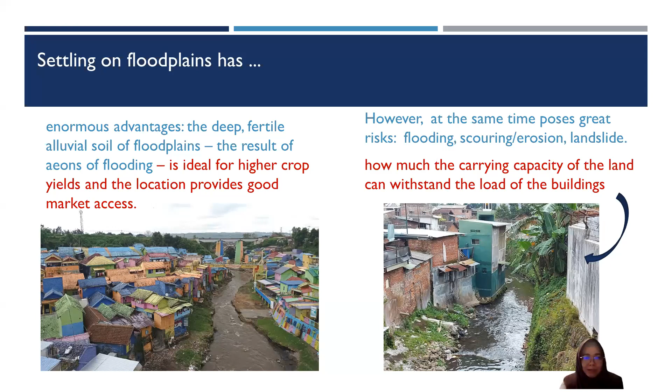In this flood-prone area, balancing development needs and risks is essential. The evidence both ways is that people will not, and in certain circumstances cannot, abandon flood-prone areas. Most importantly, there is a need to find ways of making life sustainable in the floodplains, even if there is considerable risk to life and property. The best approach is the integrated management of floods, or other disasters in this area.

The concept of IFM has already been developed in some countries in the world, like the flood-prone area in the Mississippi River. There is flood management there, so if the water level rises, there's already a system for how the mechanism works, so the big cities along the Mississippi River did not experience flood damage or flood disaster. This is called integrated flood management.

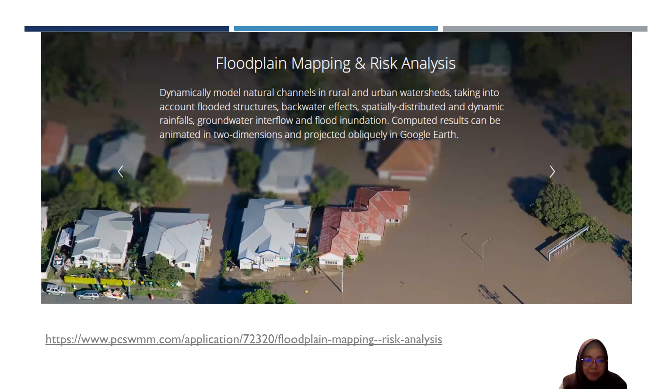This is an example from the Netherlands, the Waal River area, flooded land and floodplains. There's also good best practice on how to manage the flood-prone area in Europe, the Netherlands, etc.

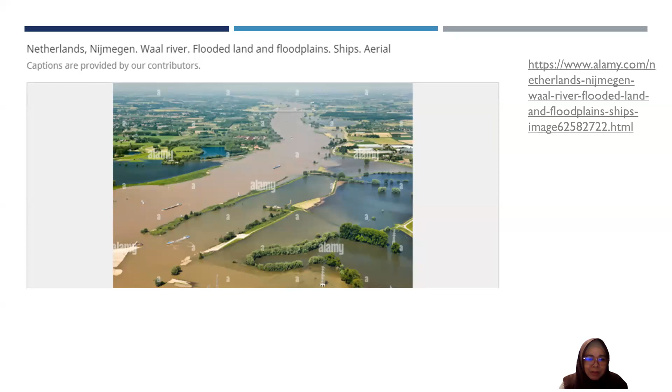This is the biggest floodplain area in the Netherlands that will be developed into a city park. This area is designed to submerge with water when there is heavy rainfall or a typhoon. So this area is not eligible for settlement or houses or buildings — just leave it as open area. So if there is a typhoon or heavy rainfall, this area will be submerged.

This program is called Room for the River. Room for the River encompasses four rivers: the Rhine, the Meuse, the Waal, and the IJssel.

Now, we in the Philippines and Indonesia probably have the same situation — we are now experiencing heavier rainfall, and because of climate change, the mean sea water level is becoming higher over time due to the impact of climate change. So the river needs more room in order to not flow uncontrolled to other places. So we have to provide room for the river so we can control the danger of the river flow.

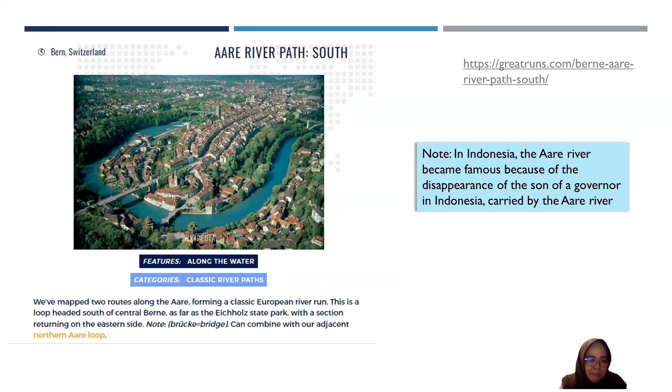We also know about the waterfront city and disaster management effort. City that directly faces the ocean or the coastal area. In the last years it developed into a waterfront city. This has an objective as a tourism destination because the view is very good, etc.

So the city is developed to be one of the tourism destinations. However, there still poses potential hazards here. So we have the waterfront city concept generally focusing on social and economic activities located in coastal areas. It is also necessary to consider the potential for natural disasters that can paralyze these activities.

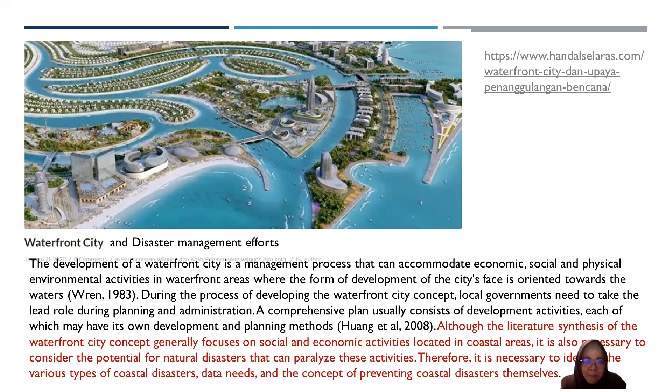This dialogue block is a question for all the audience here. Are there other floodplain areas that you have encountered, or maybe someone who has experience involved in flood management activities in flood-prone areas? Would you please share information here? Any of the students? Maybe any of the students from the Philippines in the middle of the lecture. Actually, we are still in the middle of the lecture. If you have any question, please feel free, or if you want to share about your area.

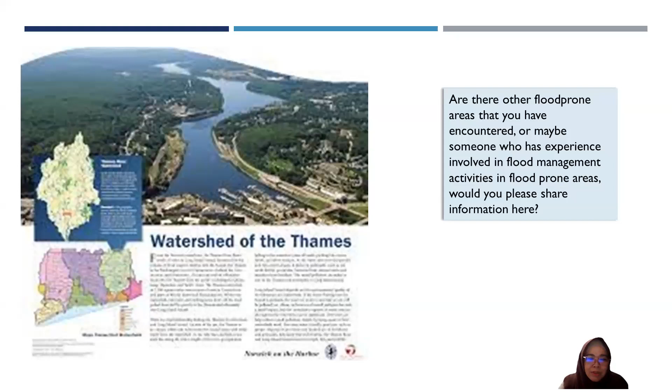I believe here in Indonesia and also in the Philippines, we experience heavy rainfall, and we have a lot of areas that are prone to flooding. So is there anyone who wants to share? If not, then we might continue first, and we will maybe do the sharing later. Students can type in the chat box if anyone wants to share their experience.

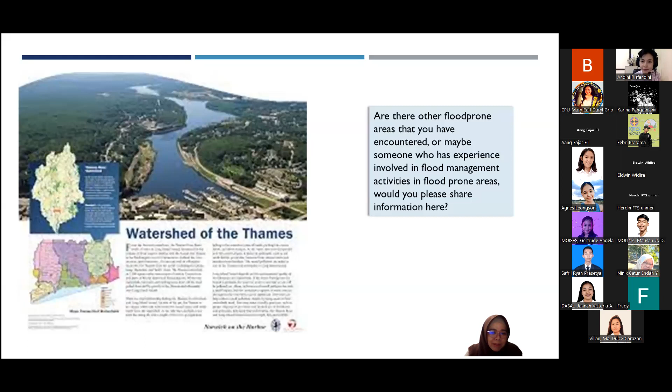So the point is that an understanding of the interplay between flood, the development process, and poverty is vital. The most important thing is that a community with a weak asset base and few multipliers of community well-being is exposed to many different disturbances, some of which may have a greater impact than floods.

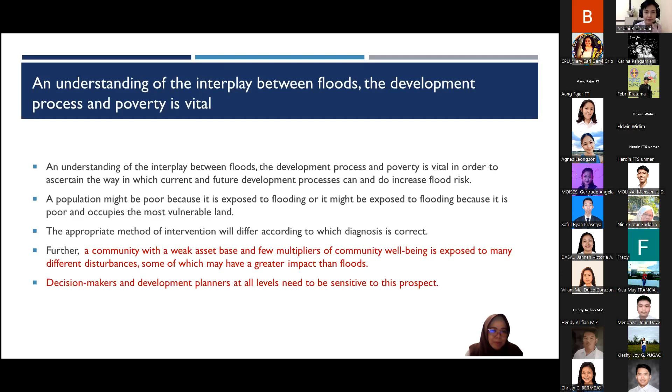Decision makers and development planners at all levels need to be sensitive to this prospect. So we will talk about risk and vulnerability. What is risk and what is vulnerability? Risk is a combination of the chance of a particular event with the impact the event would cause if it occurred. Risk therefore has two components: the chance or probability of an event occurring and the impact or consequence associated with that event. The consequence of the event may be either desirable or undesirable.

Vulnerability is a function of the ability of a society, community, or household to mobilize the assets available to meet the challenges posed by flooding. The capacity of the society to maintain or improve its quality of life in the face of such external disturbances may be enhanced either by reducing flooding or by improving their capacity to cope with the disturbances.

This is the traditional flood management option. First, storing runoff, like we build reservoirs, detention basins, dams, etc. And the next is separating floods from the population, increasing the carrying capacity of rivers, source control to reduce runoff, emergency responses, recovery and rehabilitation.

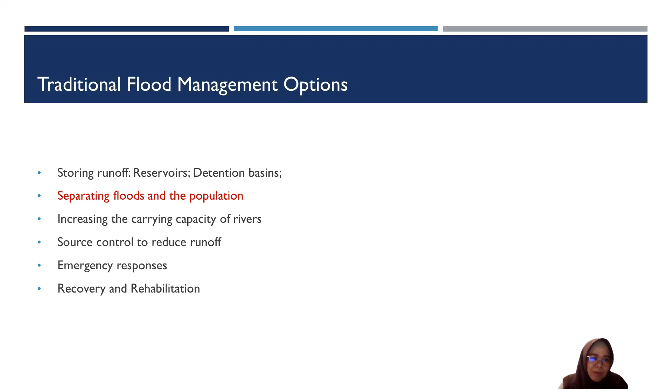The shortcomings of past flood management practices: ad hoc and standalone, reactive rather than proactive, emphasis on structural measures, monodisciplinary, and failure to learn from the past.

With integrated flood management, flood management practice is set to be proactive rather than reactive.

Challenges of flood management include the increase of population, impact on economic development, vulnerability, climate variability, hazard frequency, upstream urbanization, and hazard magnitude. The impact is that the magnitude of the hazard becomes higher. The second challenge is securing livelihoods and ecosystem conservation.

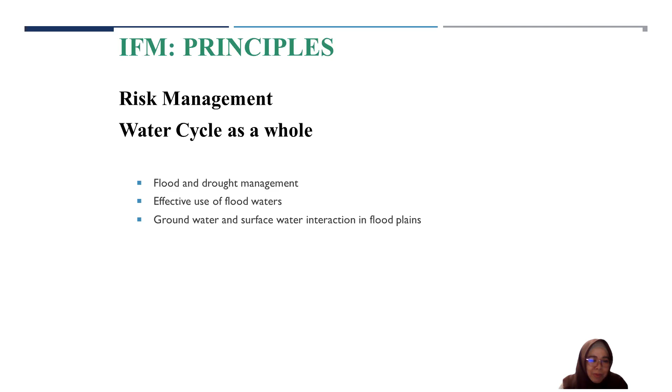Water cycle as a whole: if we apply the IFM principles, we have to know about the water cycle, like flood and drought management, effective use of flood waters, and groundwater and surface water interaction in floodplains.

The next principle is the multi-hazard approach, cross-sectoral integration of disaster management strategies, not only for flood hazard but other hazards that may come up, including disaster risk assessment, early warning and forecast.

River basin approach: we have to use a river basin approach because water or river naturally acts according to the characteristics of the river basin.

Public participation is important because the hazard affects the people, so it's very important to involve public or community participation.

IFM is towards an integration of land and water management, upstream and downstream, structural and non-structural, short-term and long-term, local and basin level measures, top-down and bottom-up decision-making, development needs, ecologic and economic concerns, and functional integration of institutions.

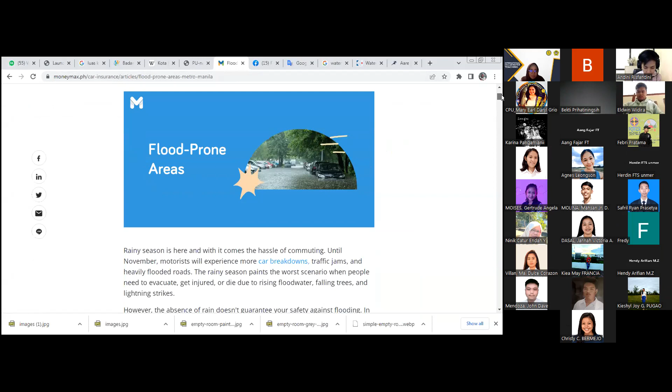Maybe you can see here what the flood-prone areas in the Philippines are. This website is for MoneyMax, which I think is an agency that helps those affected by flood repair things like cars or homes, so mainly vehicle repairing.

So they have identified the areas in Manila that are frequently affected by flooding because of typhoons, heavy rainfall, etc.

Rizal Avenue - maybe a student from the Philippines can give a comment or explanation. Is it true that this area experiences flooding?

This is in Caloocan City. Flooding in Caloocan City is usually caused by river overflow, excessive rainfall, and inadequate channel capacity, affecting areas like Rizal Avenue, ITC compound near General Luis Street, and General Pio Villanueva Street to Lapu-Lapu Street.

Okay, maybe the student from CPU can give a comment here about flood prone areas in Las Pinas. Maybe you have directly experienced this flood.

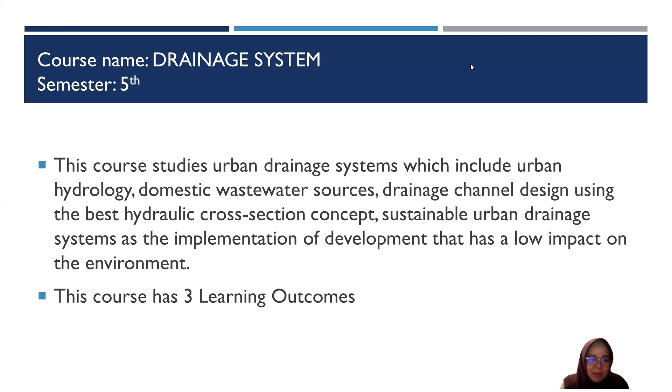This is the semester learning plan. The course name is drainage system, for students in 5th semester. This course studies urban drainage systems, which include urban hydrology, domestic wastewater, etc. This course has 3 learning outcomes. The first is students are able to design new drainage channels and evaluate existing drainage channels using the best hydraulic section principle. This is the sub-course learning outcome.

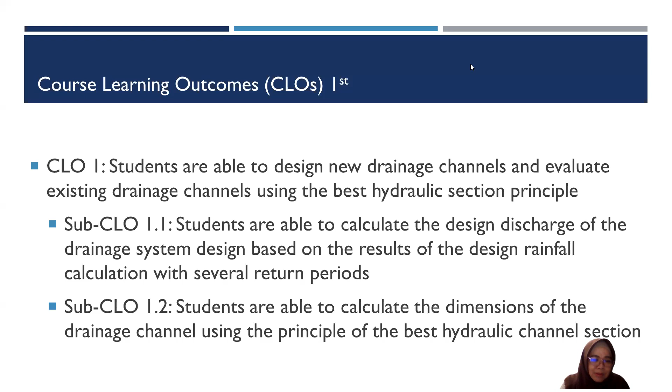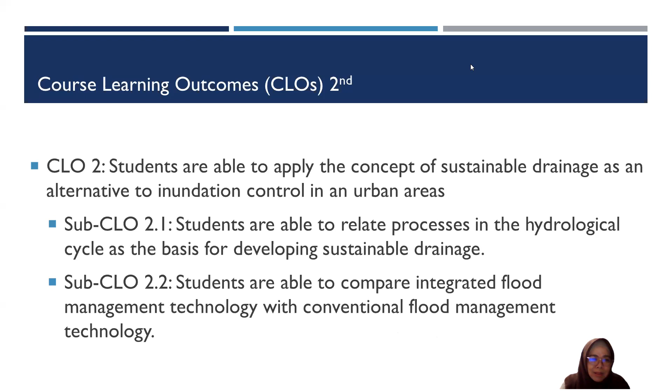There are 2 sub-CLOs. The second course learning outcome is that students are able to apply the concept of sustainable drainage as an alternative to inundation control in urban areas. The third and last course learning outcome is students are able to identify and develop alternative solutions to drainage problems in urban areas.

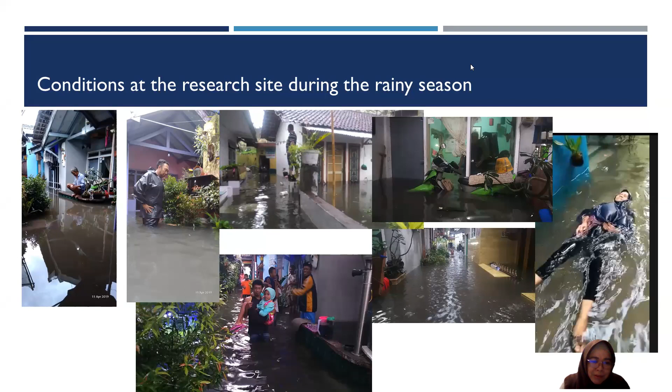This is the manifestation of the values of local wisdom in society. There is mutual cooperation, in Javanese language called gotong royong, and living in harmony, or guyub rukun, in Javanese language. Residents who were not affected by flood help clean the houses of residents affected by the flood, as well as providing temporary shelter and meals during the rain. This is the manifestation of gotong royong and guyub rukun.

So maybe the student from the Philippines can explain, are there local wisdom values in the Philippines that have been embedded in the community that are used to support people if there is any hazard that happens? Maybe you can give an example of the local wisdom there in the Philippines.

Maybe not yet. Okay, maybe at the end of the class we can have the sharing session. Thank you, okay.

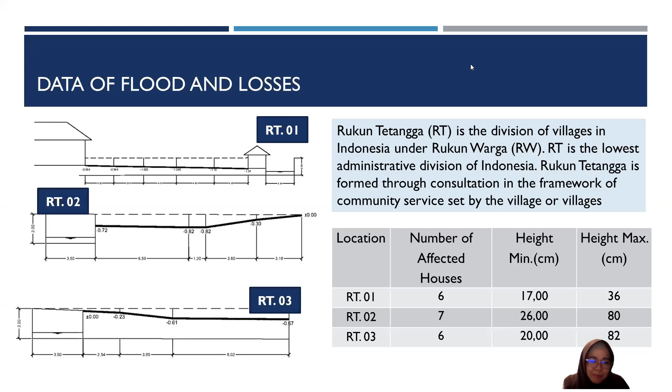This is the data collection of flood losses. The flood losses are about, per house, for every one flood event, about $100. The average losses are about equal to $100.

Comparing with their salary, their average income is only about $200. They experience losses, and feel the risk of flood because they lost a lot of money. A single flood can make them lose half of their income in a month. So people want to do something to minimize the losses.

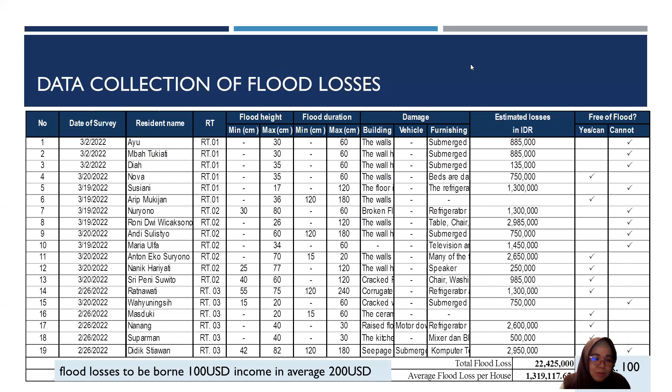There was a discussion between students, the research team and the community to develop alternative solutions to minimize flood risks: renovate the houses of residents affected by flooding to be flood resistant or water resistant houses, install an appropriate early flood warning system, and prevent water ingress, backflow or backwater from the city drainage channel to sewers in the residential area. These three alternative solutions came from the discussion between the community and the students.

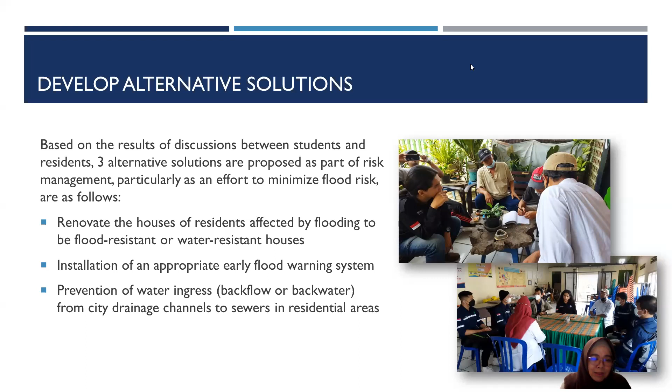Following up on the discussion with residents, these topics are also used as final projects for students involved in the research. First, a study on design criteria for flood resistant houses in Glintung Village, developed by Safril. Second, a flood early warning system based on community local wisdom in the IoT era, a case study at Glintung Water Street (GWS) Malang City, developed by February. Third, a study of pump capacity as an alternative solution for backflow control in Glintung Village, Malang City, developed by Handy.

Are the students here? Safril, already joined? Okay, thank you. February, already joined? Yes, okay, thank you. Handy, already joined? Yes, okay.

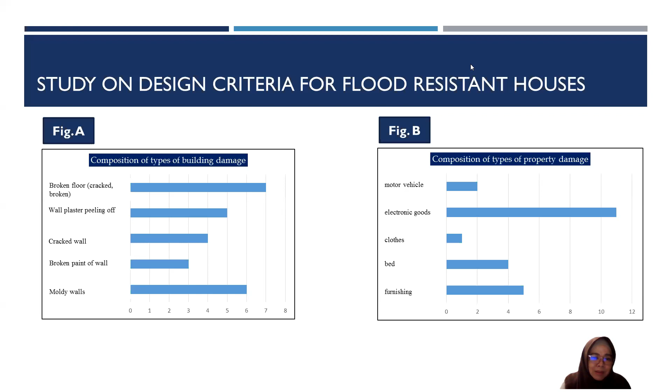The design criteria for flood resistant houses was developed based on the composition of type of building damage and composition of type of property damage. The biggest damage is broken or cracked floors, and for property damage, electronic goods are the most affected by the flood.

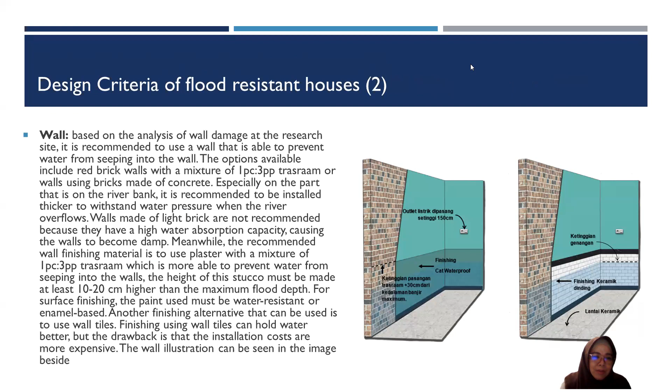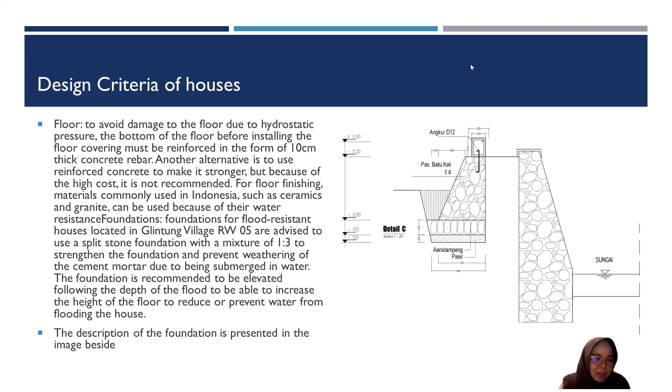This is the design criteria of flood resistant houses for the wall, which you can read on your own, along with the floor and the description of the foundation. I think that is suitable for the local study area.

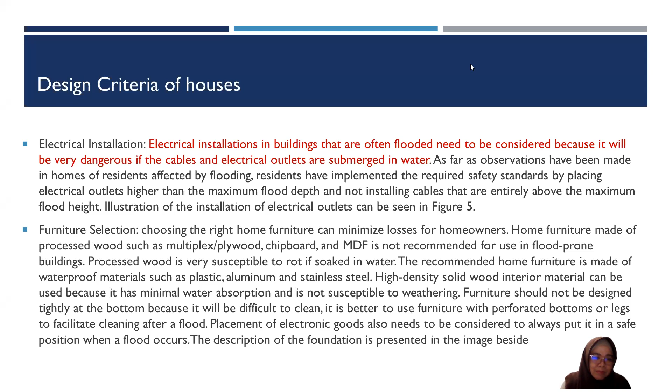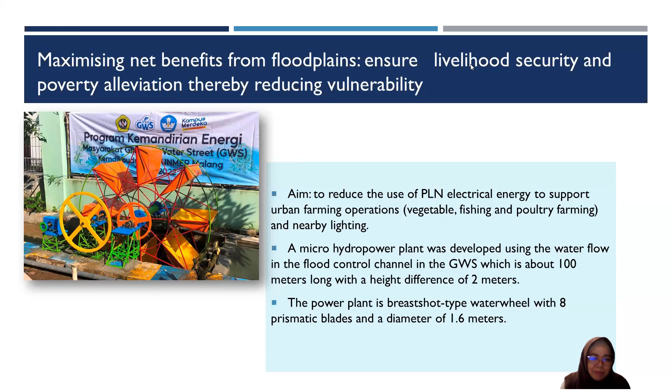This is the data analysis of the discharge for the water wheel under low flow conditions, measured from March until April this year. This is the result.

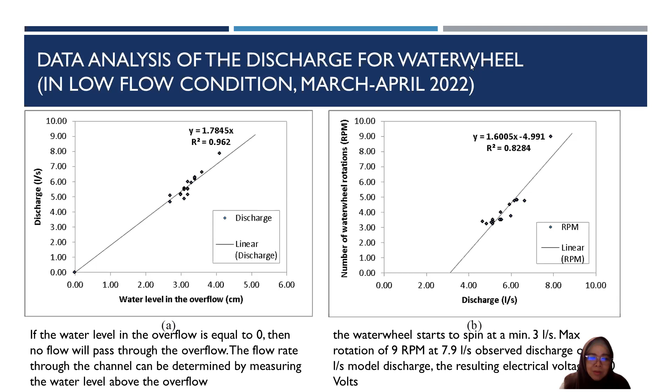The conclusion of the result analysis is that at low flow with a flow rate of 3 liters per second, the water wheel can rotate. The condition of the channel around the water wheel limits the maximum discharge to 15 liters per second, with a water wheel rotation of 19 RPM and a voltage of approximately 40 volts. Plans to add an open channel, closed channel, or pipeline must pay close attention to the resulting impact. Further studies are needed on the placement of water wheels and additional discharge so that more electricity can be generated, or on developing renewable energy technologies from different sources such as solar or wind.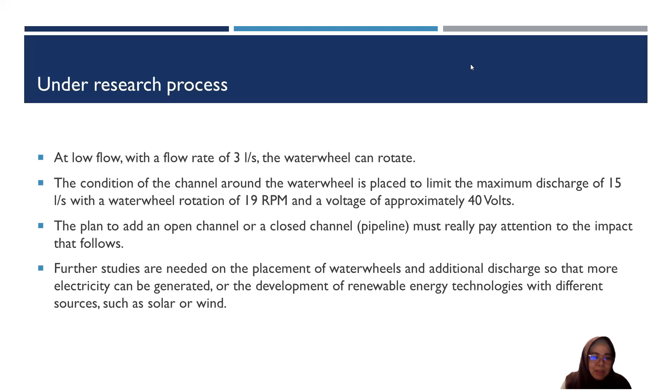Thank you for watching.

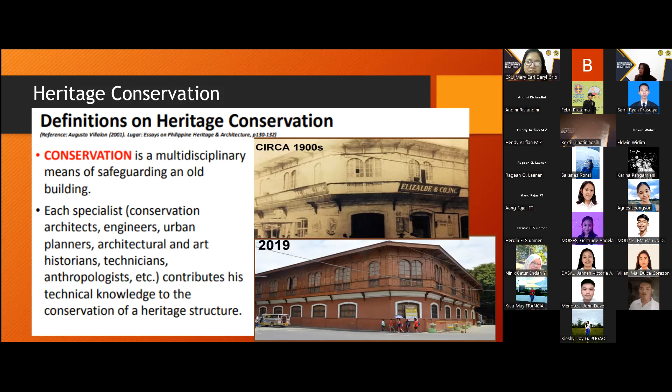While restoration is the process in which interventions and additions that have been made to the structure at a later date are removed to return the structure to its original form. So the original look is returned and the added contemporary embellishments are removed.

The third method of conservation is reconstruction, and this is the rebuilding of a faithful copy of the structure based on an original plan and done under strict supervision by a conservation team.

Then we have, common in Iloilo, adaptive reuse. This is the adaptation of an old structure to allow the introduction of a modern function into the old structure. So old buildings are not demolished, but they are recycled into modern uses.

What we don't want, of course, is remodeling. Remodeling is the drastic renovation without regard to the structure's original state, and it changes its character completely. When an old structure is remodeled, its authenticity, ambience, and historical value are gone forever.

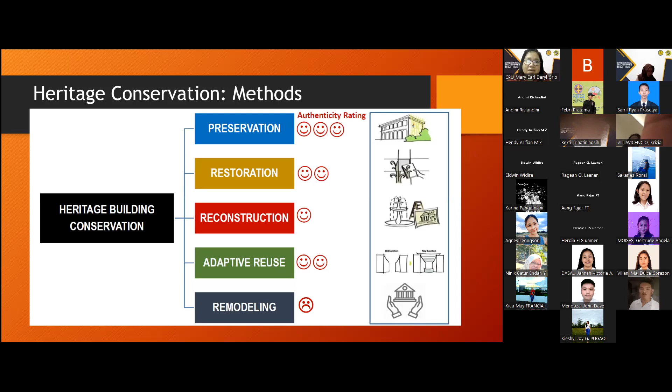Now here is an example in Iloilo City of an adaptive reuse building. This building, as you can see, dates to around the 1900s. It was actually built by a company in the business of selling products such as sugar, abaca fibers, wine, and paints. It was then sold to the Elizalde family and became known as the Elizalde Building, becoming a house of trade in 1934.

From 1987 to 2009, this building became a house for government offices, especially the Commission on Audit, and also the annex office of the Iloilo City Hall until 2010. I think it was in 2011 that the City Hall had its own new building, so all the offices moved there. Then in 2014, rehabilitation works were started by the National Historical Commission of the Philippines, and in 2017 it opened to become the Museum of Philippine Economic History.

You can actually go here for free, since it is owned by the government. And it's fairly easy to see because of its red brick color.

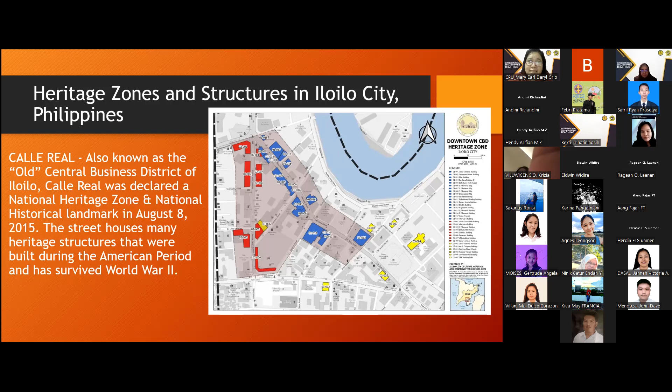Now, things you can enjoy when you come here in Iloilo City. First and foremost are the people—we are said to be malambing, or soft-spoken and loving.

We also boast of our places that are of cultural heritage, and we have a lot of river esplanades. As I can remember, since 2008, flooding was no longer a problem here in Iloilo City because of the flood control project.

The development of the river into esplanades has also been effective in deepening the shallow parts of the river, so it can serve as a form of flood control.

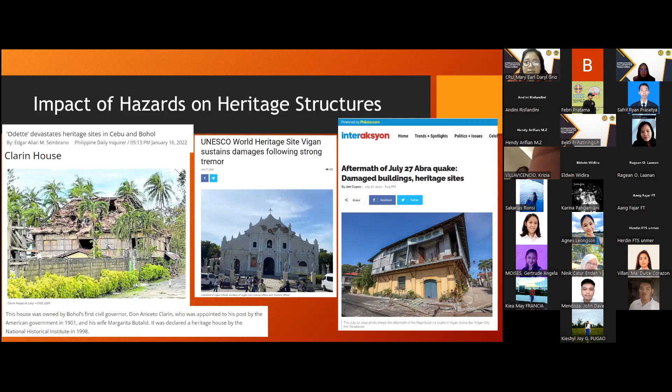These two pictures beside it are due to an earthquake—there's partial damage to a church, which is a World Heritage Site in Vigan, and also this building, which is an ancestral house.

In Iloilo, we did have a big fire in the Calle Real area, which I presented a while ago. Today, if we plot what was damaged by that fire in 1966, it's about three-fourths of the city proper area.

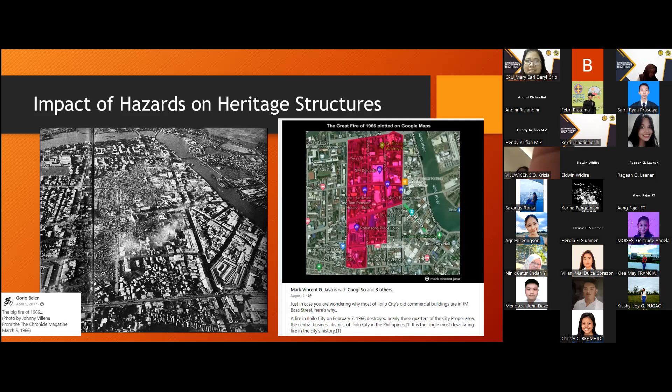Our area of study for the research that we did, or are still doing, is here—it has been spared by the fire, but we would have had more heritage structures if not for the fire in 1966.

Let me go now to the role of structural engineering in heritage conservation. Here are the common reasons we need structural engineers to assess heritage or historic structures. First is if there is visible deterioration or known failure—corrosion of iron or steel, roof members, cracks or dislocated masonry, tilting of walls. Then a structural engineer is called upon to assess the building.

Structural failure due to design and construction of the buildings, deterioration of the building enclosure such as the facade and roof system due to water infiltration, corrosion of iron and steel, and rotting of wood, which is the common material for our old structures. The lack of documentation also falls upon us to perform structural analysis.

There would oftentimes be changes in occupancy and increases in loading, which would require us to analyze the structure. We are also called upon when there are severe events such as earthquakes, winds, floods, blasts, or fires.

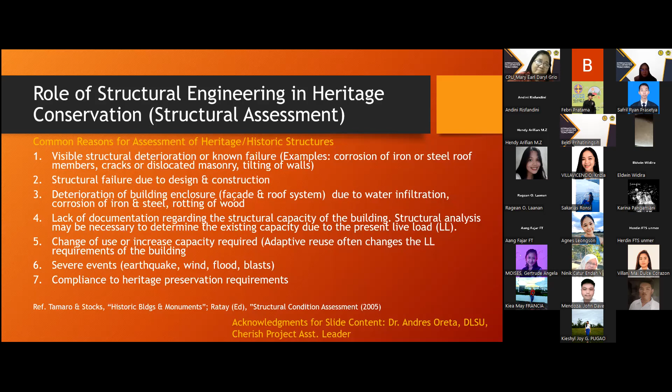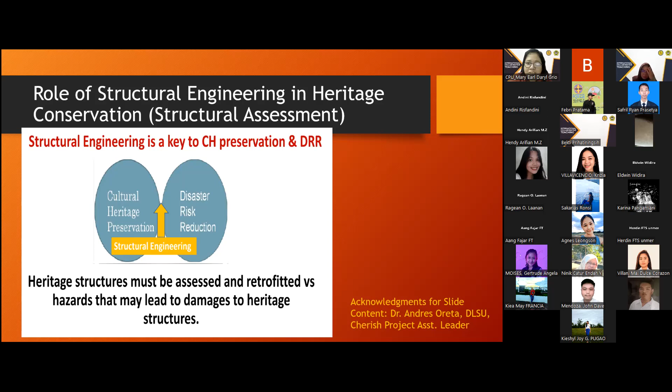We are also called upon to determine whether the heritage structure has complied with heritage preservation requirements. Therefore, structural engineering is actually the key to cultural heritage preservation and disaster risk reduction. Heritage structures must be assessed and retrofitted against the hazards that may lead to more damage to our heritage structures.

Now, in structural evaluation, we have three levels. As we go up, it becomes more costly, more complicated, and more time-consuming.

For level 1, we can do RVS, or rapid visual screening, wherein we have a checklist form. For level 2, we can do detailed inspection and perform NDT, non-destructive tests or semi-destructive tests, with computer modeling once the data is analyzed. Level 3 would be for nonlinear analysis and structural retrofitting.

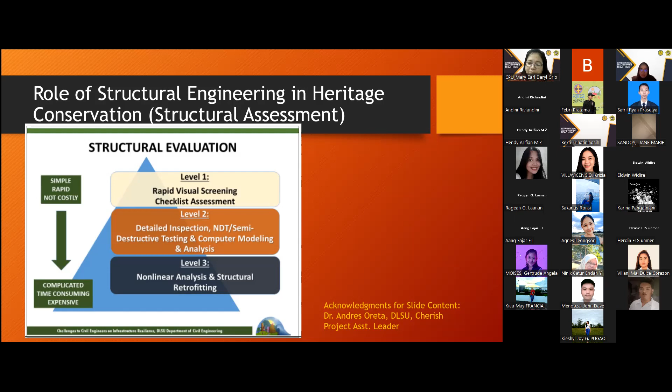So in level 1, rapid screening, this is usually used for prioritization or ranking the buildings according to being high risk for a certain hazard or risk.

Here we can group the buildings according to asset values and their importance or use. We can also rank the buildings according to the scores from the screening, so we can prioritize which buildings need immediate attention for a more detailed structural evaluation based on the risk rating. We could use this RVS to decide what action must be done on the buildings.

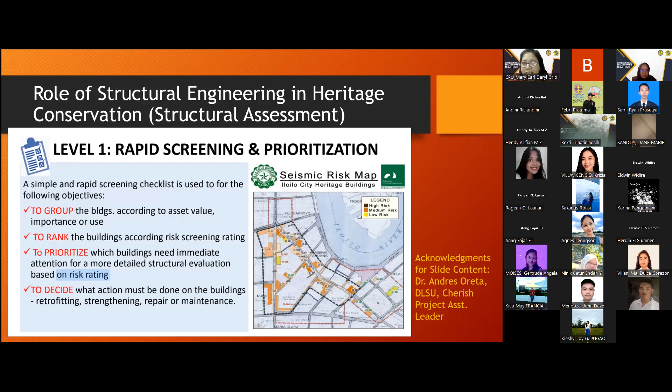Do we need retrofitting, strengthening, urgent repairs, or maintenance for the structure? Level 2, we have the non-destructive and semi-destructive tests. Here, the objective of doing, for example, the rebound hammer test or scanning the rebars for their location...

...or doing the semi-destructive test of getting samples from structural elements, we can actually get the material properties, the mechanical properties of the materials.

The challenge here is to have a portable and effective non-destructive test for our heritage structures, especially for unreinforced masonry, for wood, and even for reinforced concrete heritage structures.

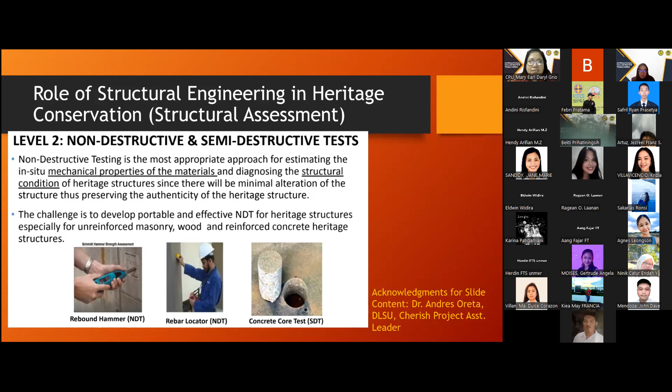So here are examples of the performance of the SDT, or the concrete core testing, getting samples from a structural element. We can also do rebound hammer tests and locate the rebars, and our instrument can even detect the size of the rebars used.

Now, we don't have this, but having an ultrasonic pulse velocity, or UPV, for the non-destructive test would be helpful in identifying or describing the quality of concrete. You can see how dense the material is, or the presence of voids in the material.

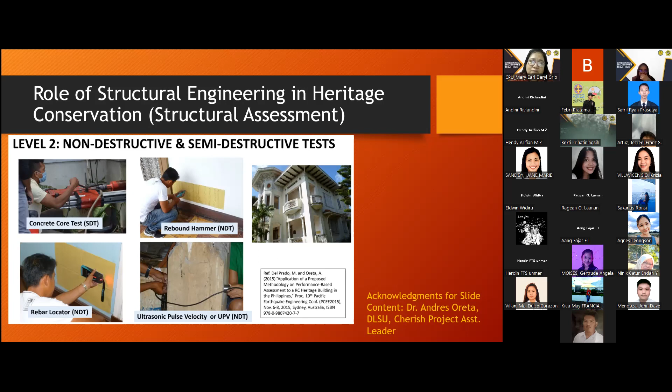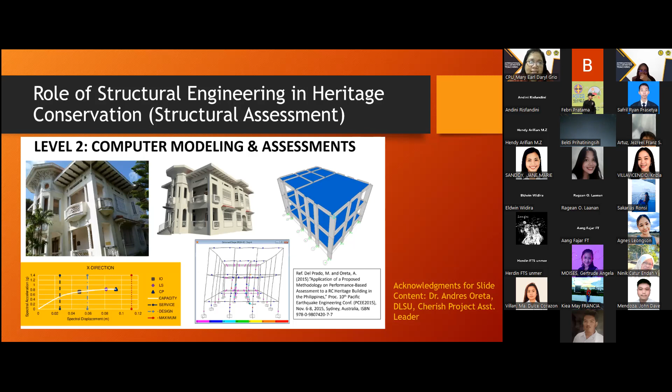In level 2, we can also do computer modeling and assessments using software. In level 3, this is structural retrofitting.

And here we have a lot of challenges. We need to do structural retrofitting so that our historic materials are preserved and retained, and we should respect the character and integrity of the historic building. It's said that the retrofitting work should actually be reversible, meaning you can remove it to a certain extent if you would again have to repair or do further maintenance of the structure.

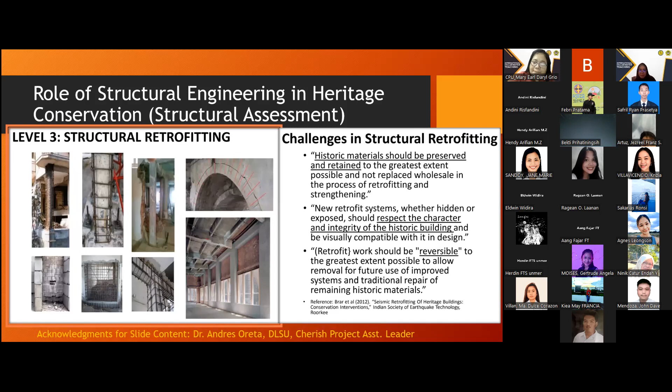CPU and De La Salle University in Manila have long been partners in research collaboration efforts. We started in 2013, wherein our BSc students, the undergrads, assisted in the collection and analysis of data. Three research titles were derived from the same set of data, which was used for now Engineer Kirk Hughes' BS and masteral program student thesis.

The output of what they did is a very important one: a guide to risk assessment of heritage buildings, as well as a presentation at the international conference on cultural heritage and disaster risk reduction. The data that was collected and analyzed was assisted by the CPU students.

Now, the Cherish project, which is in Calle Real, Iloilo City, which I've shown you a while ago, in 2019 evolved into a new collaboration, this time with University College London of the United Kingdom. Three local universities, University of the Philippines Visayas here in Iloilo City, Central Philippine University, and again De La Salle University in Manila, collaborated for the Cherish project, which is cultural heritage resilience and sustainability to multiple hazards.

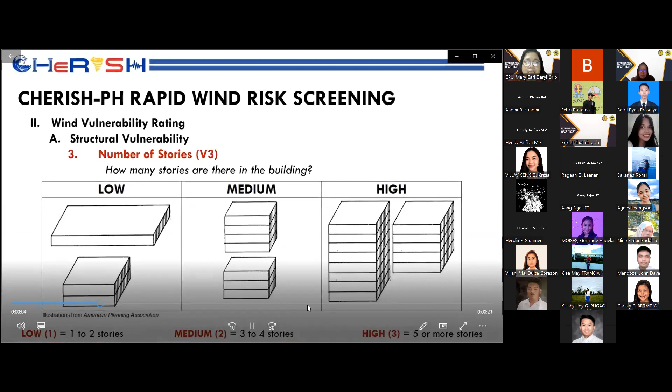Okay, can you see that? So during the workshop, we provide the screen, and the participants can see this, read the description, and then join and assess the given figure, posting their vote on whether it's low, medium, or high risk. So this is how we do it.

Okay, I'll proceed to my next slide. So that is what we did, and then for the Cherish project, now we have methodologies.

Here, the CPU BSc students are involved in the photo RVS, under close supervision by the Cherish core team. While the fire risk assessment is already face-to-face, the students who were formerly involved were also involved in the face-to-face fire risk assessment of structures. And this is the Cherish project team.

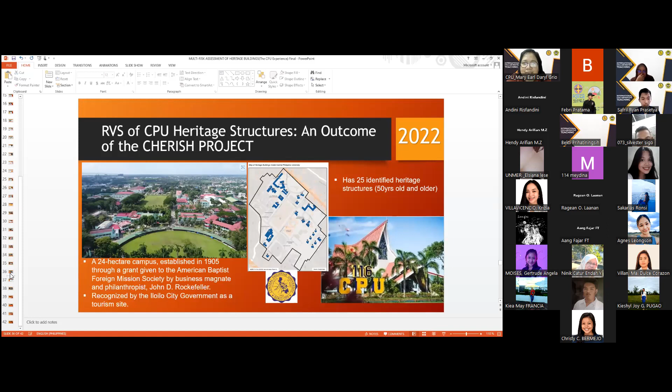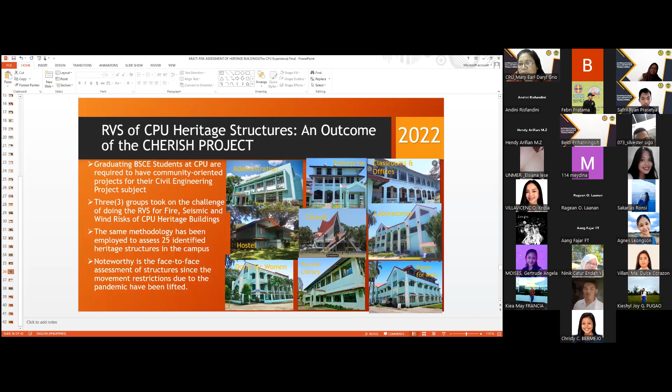And in the campus, we have a lot of buildings. These are the heritage buildings with multi-use or multi-purpose. An additional output, other than what has been discussed, is that the students were able to develop the fire risk map and the building information sheet for each of the structures in the campus.

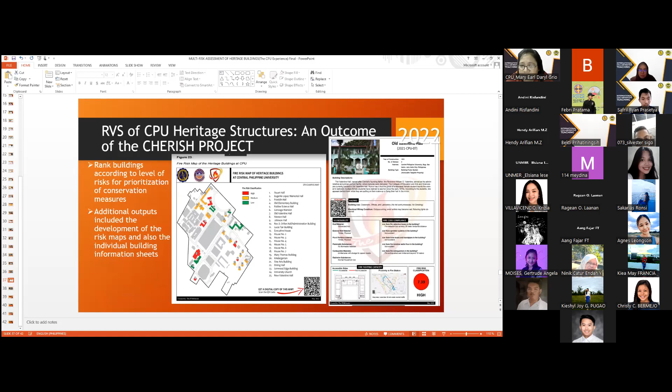Okay, so this is the RVS team. And if I may, now I'd like to show you a short video of the activities and learnings of the RVS team students.

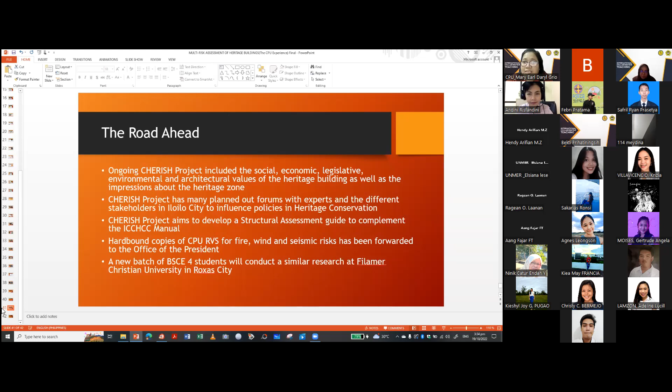And currently, a new batch of BSCE 4 students will conduct similar research at Filamer Christian University in Roxas City.

With this, I would like to thank the University of Merdeka, Malang, Indonesia, for this opportunity to share our experience. And of course, the Cherish Project team, the faculty and students, our LGU in the city, and especially the CPU RVS teams who have been with me through the journey in Cherish and also in the assessment of structures inside the campus. And of course, to our seminar participants, thank you for your presence, and I hope you have learned a lot from my presentation. Good afternoon, and thank you, everyone.